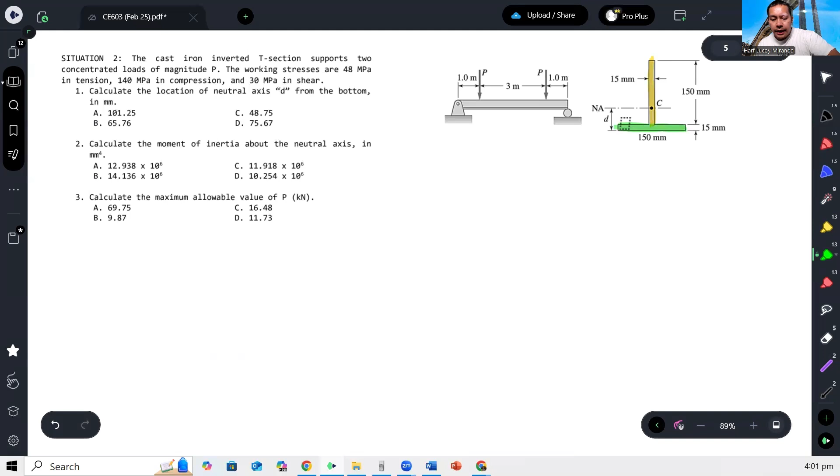First question: calculate the location of the neutral axis D from the bottom. To find the location of the neutral axis, we'll use Varignon's theorem. Let's divide this into two rectangles - this whole rectangle, and this other rectangle. Now let's apply Varignon's theorem.

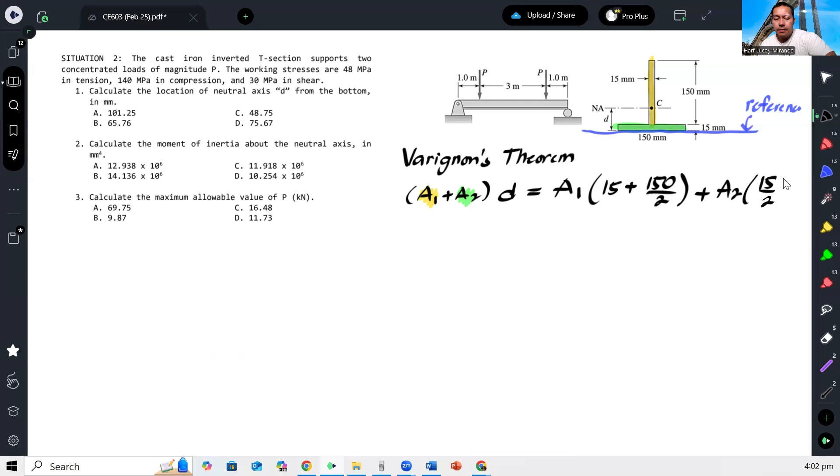The moment arm of the yellow area from the reference is 15 plus half of 150. Plus the area 2 moment arm is just half of 15. Area 1 is 150 by 15, while area 2 is also 150 by 15, so they're actually equal.

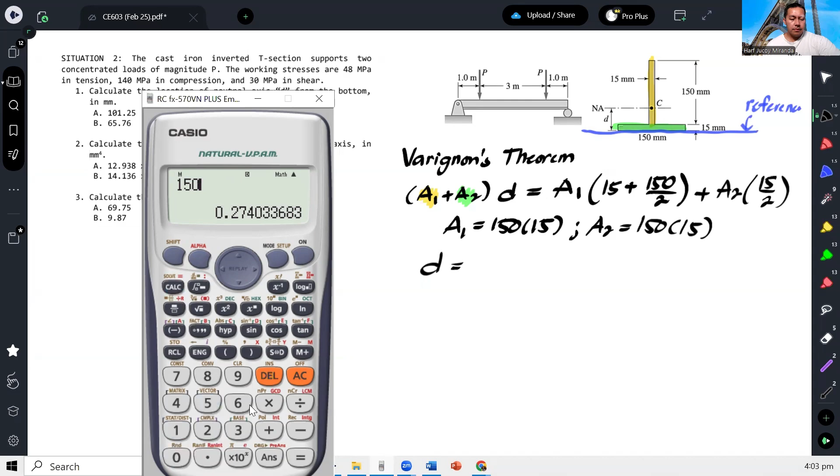So therefore, we can solve for D. They're equal, right? No, that's different. Okay, so that gives us 48.75.

That's for number 1. Number 2: calculate the moment of inertia about the neutral axis. What's the moment of inertia at the neutral axis? We'll use the transfer formula, or parallel axis theorem.

Our moment of inertia is equal to the summation of the centroidal moment of inertia plus A times d squared. Let's start with the yellow area. For I_NA, which is the horizontal axis: the yellow area has base 15, height 150, cubed, over 12, plus the area of the yellow section, let's call it area 1.

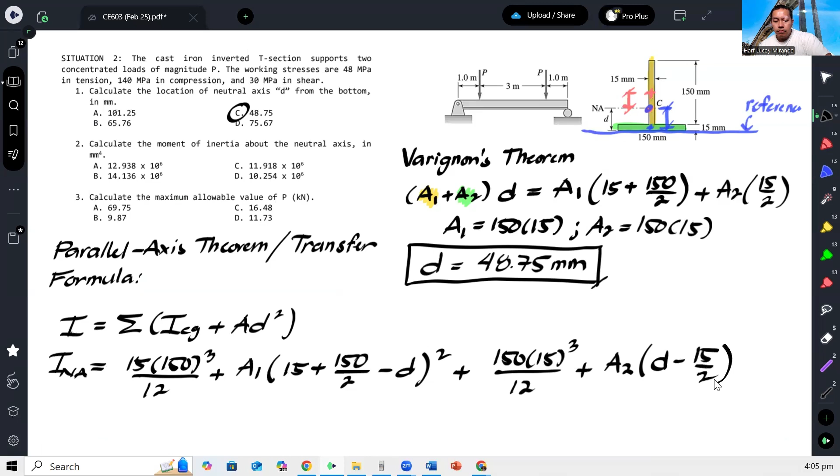Then for the green area, base 150, thickness 15, cubed over 12, plus area 2 times its location. Its centroid is here, and we're solving for this distance, which is D minus 15 over 2, squared. Because from the bottom to the centroid is D, and from the bottom to that centroid is half of 15. That's our moment of inertia at the neutral axis.

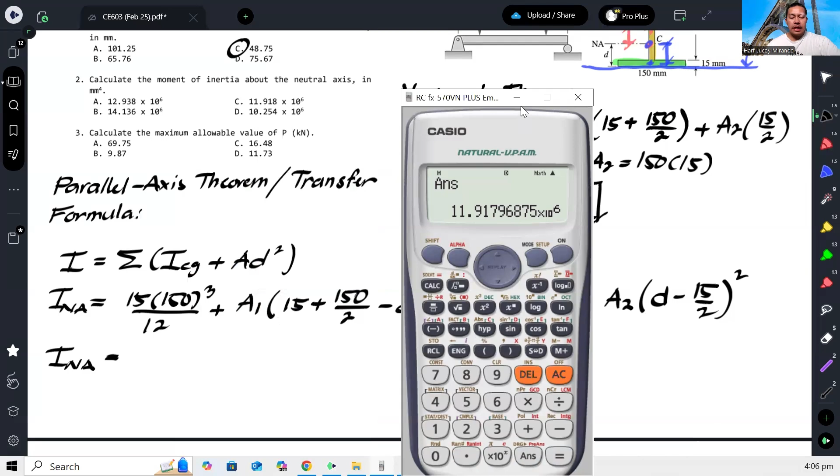That gives us 109... so about 11.918 times 10 to the 6. Let's store that.

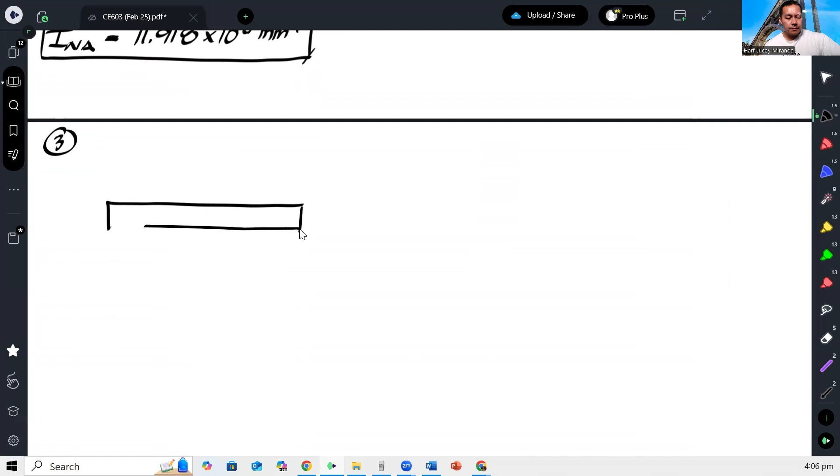Okay, next, number 3: calculate the maximum value of P. This means based on the allowable stresses. Let's draw this out. For number 3, here's our beam, and here's our P.

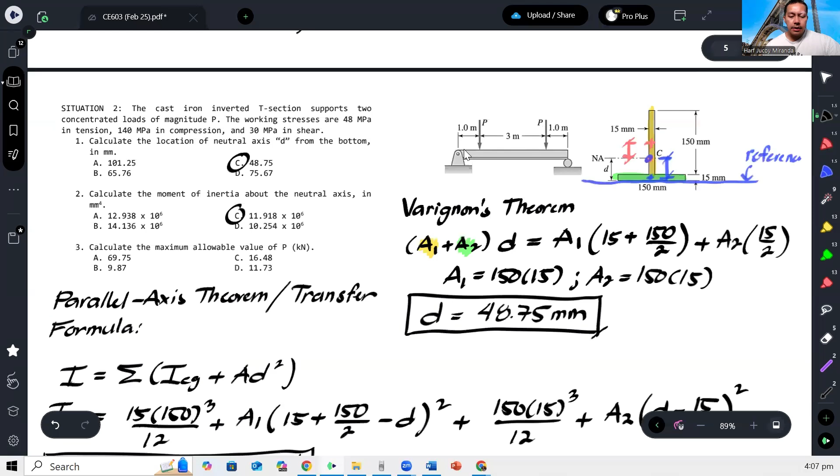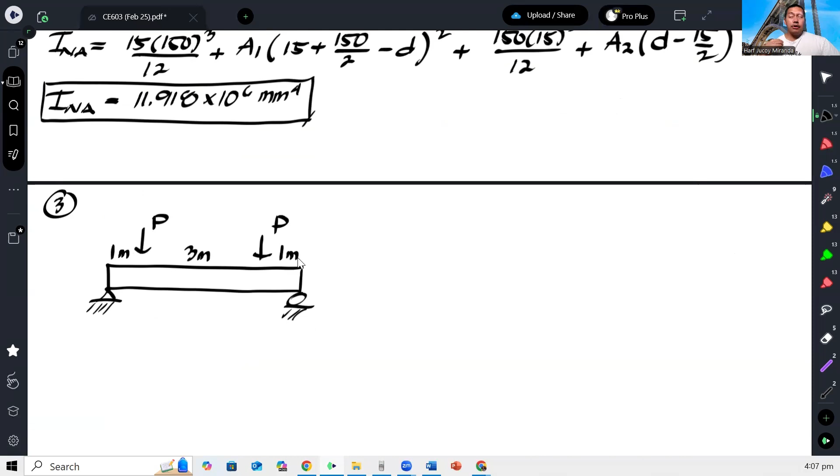The loads P are located at 1 meter from the left and right. So the question is, we need to determine the maximum moment in order to define the compression and tension.

The tension and compression here are due to bending, not direct tension or compression - it's actually from bending or flexure.